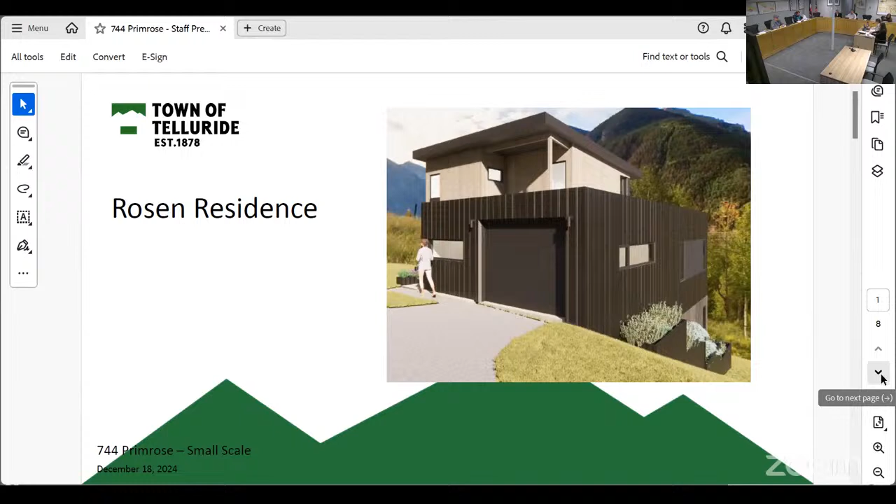Darren: Great, thank you Mark. So this is the consideration of an application for small-scale new construction of a principal structure in the Hillside Developing 2 Zone District, 744 Primrose. The project scope is new construction of a single-family residence. The proposal may look familiar as it was continued from the September 18th HARC board meeting as well as November.

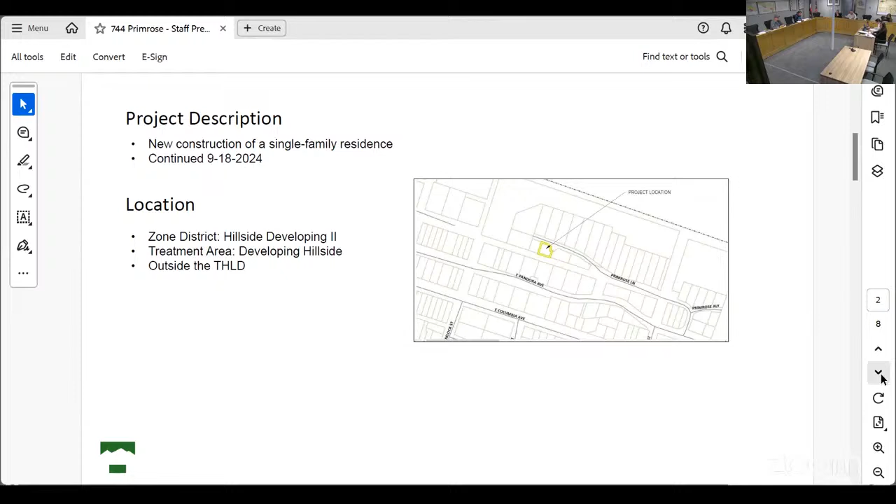The lot is located on the south side of Primrose Lane in the developing Hillside treatment area. Previous conditions from the September meeting, 1 through 3, all relate to the stepping down of the structure to better blend with the natural topography and reduce the apparent mass, scale, and visibility. To address these conditions, the applicant reversed the roof slope, lowered the upper roof 10 inches, lowered the parapet wall's height, and added planters to the west and southern facades. However, the overall mass and form of the building did not change significantly enough to meet conditions. Therefore, conditions 1 through 3 are retained.

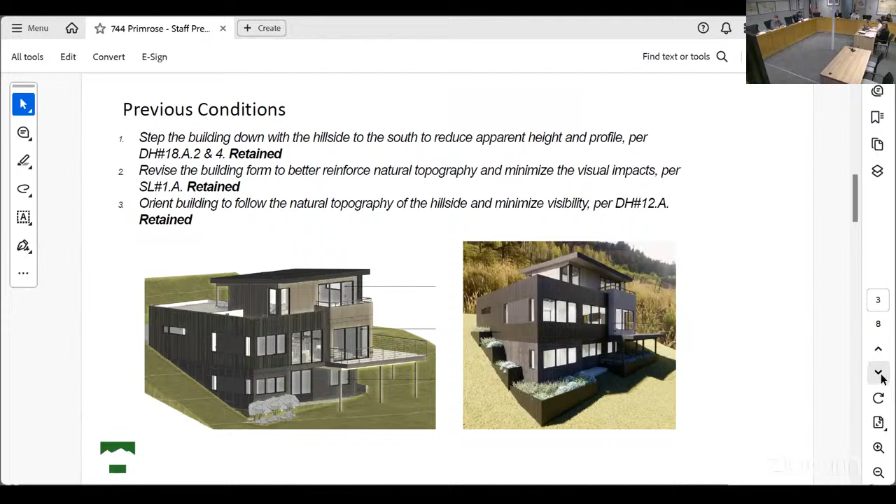Okay. Questions? Are you done? No, I'm still going. Oh, okay. Thanks, Mark.

Previous conditions 4 and 5 were to reduce the amount of glazing on the southern facade and to reduce the size and groupings of the windows to be more traditional. The applicant has reduced the glazing by 16.3%, with special attention to the southern facade. HARC should discuss if these conditions have been met.

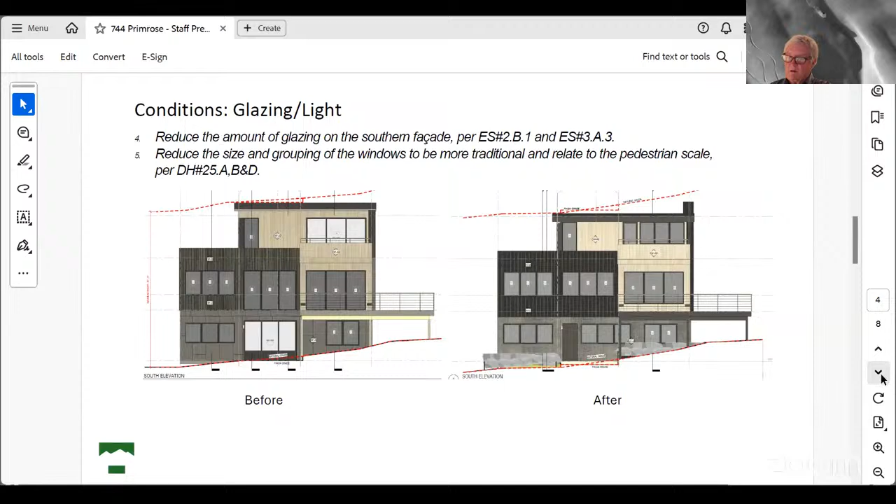Conditions 7 through 9 were to revise the proposed siding materials to be applied more traditionally with traditional dimensions and limit the use of corrugated metal on the principal structure. Wood, board, and batten are now proposed siding material for the garage and chimney element, with heavier materials such as board form concrete on the foundation. Conditions 7 through 9 have been met.

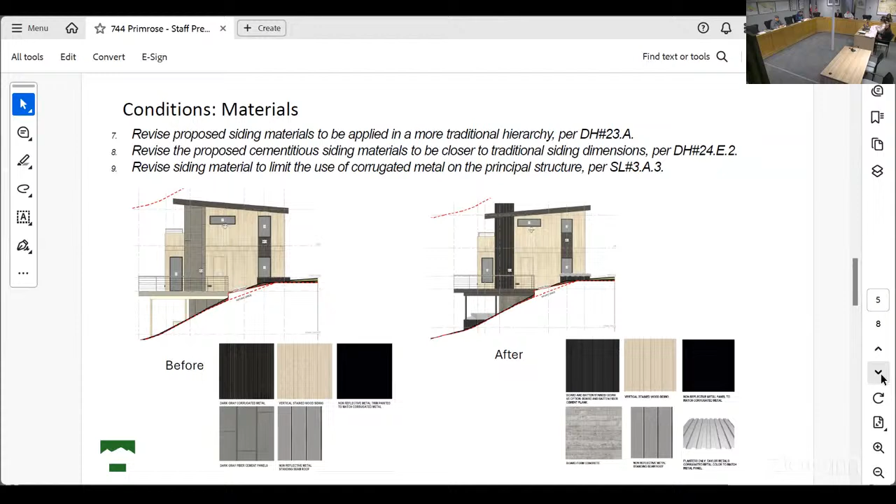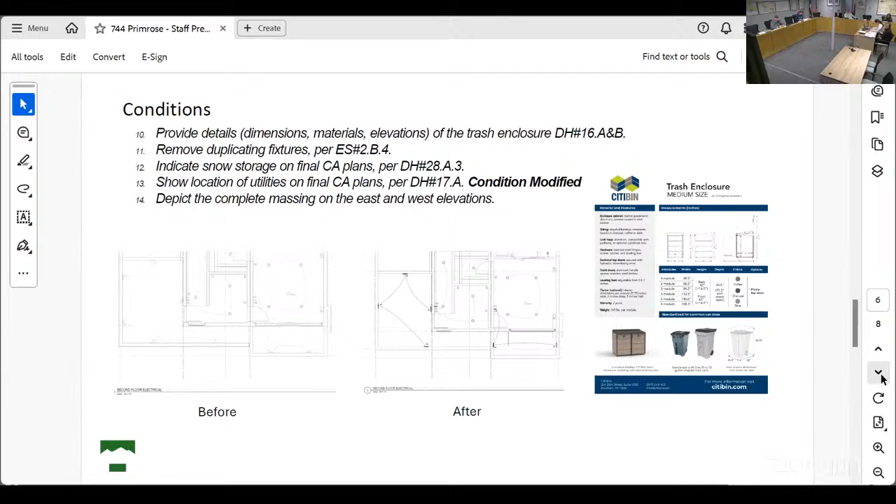Condition 10 has been met with the provided details of the trash enclosure. Condition 11 was to remove duplicating light fixtures; this has been met with 1 step light removed in the entry, as well as 2 removed from the upper deck. Condition 12 has been met with snow storage indicated on the plans. Condition 13 has been modified to show the location of utilities on the final CA plans. Condition 14 has been met with the first and second level decks now depicted on the west and east elevations.

Staff recommends adding a new condition to revise the landscaping and planters to be more natural to minimize visual impact. The proposed planters add a more ornamental appearance, affecting the visual impact of the building.

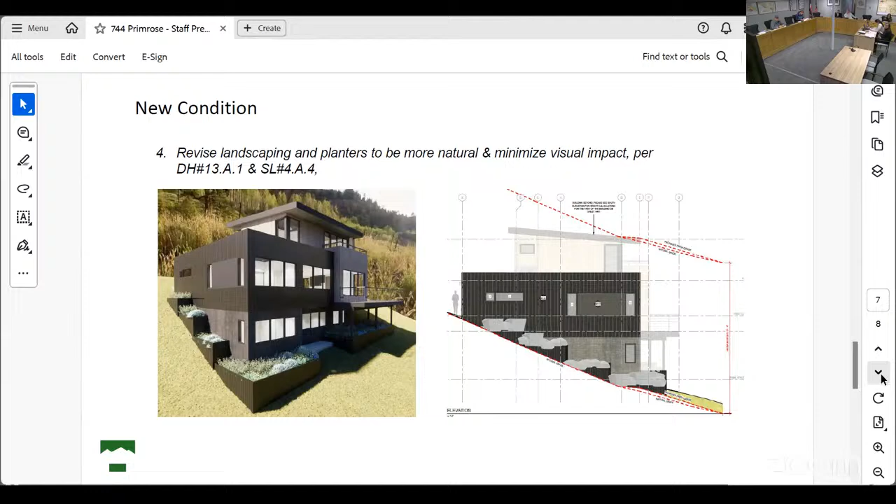A number of conditions were retained and 1 new condition added, revolving around landscaping. While the roof form was changed and the planters were added, the overall mass and form of the building did not change significantly enough. Given there are still concerns around mass and scale, staff recommends continuing the application. Thank you, I'm happy to answer any questions.

Okay, thanks, Darren. Questions? Okay, you did a good job. Thank you.

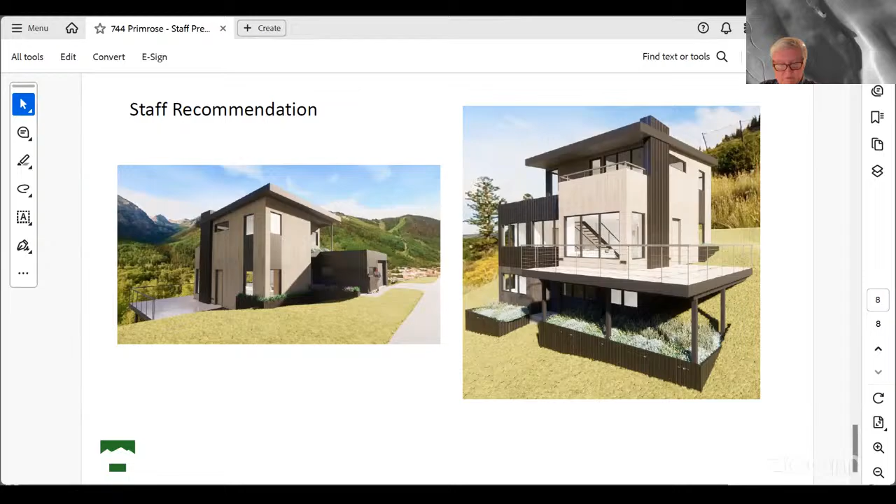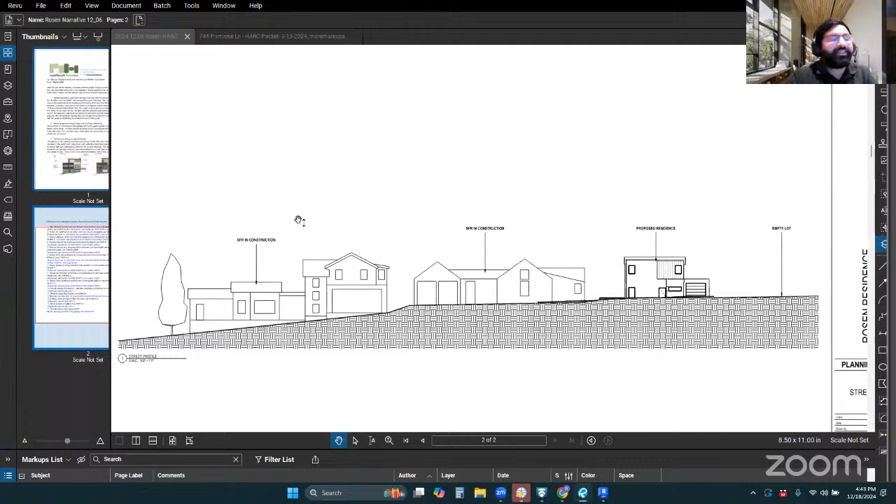And we'll hear from the applicant. Is Rohan remote, I assume? Yes, Rohan is remote. Okay, welcome, please. Great, share screen. Where's the sunshine? You must be in California. It's aspirational sunshine, definitely in Seattle, so very gray over here. Okay, great, thank you staff for presenting the project.

I wanted to start by discussing the steps we've taken to reduce the scale. We recognize the biggest obstacle in the last two HARC hearings was stepping the building down the hillside to reduce the scale of the building to the southern exposure. In the last hearing, the board recognized that the scale of this building is not similar to the scale of other buildings that have been reviewed.

This is a 1,500 square foot building, and this lot is the smallest lot in the Overlook PUD with the PUD bonus. Any additional adjustment of the footprint would go over the impervious area requirements set out by the PUD, so there's not much room to make significant adjustments to the exterior envelope to step the building down the facade any further than it's currently been stepped.

That comes from two pieces. One, if we tried to lower the building physically more on the lot, there would have to be a whole flight of stairs between the garage and the ground floor. There's already the maximum number of steps that make sense. We've already lowered the first floor relative to the street grade as much as possible.

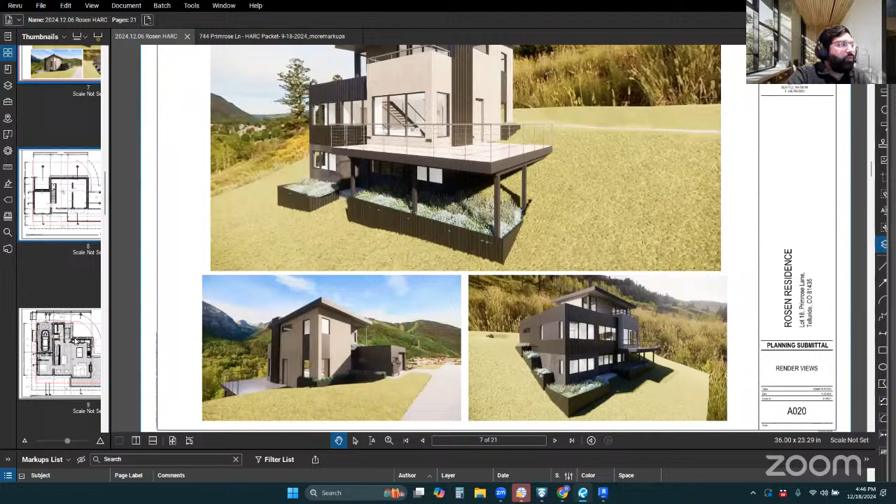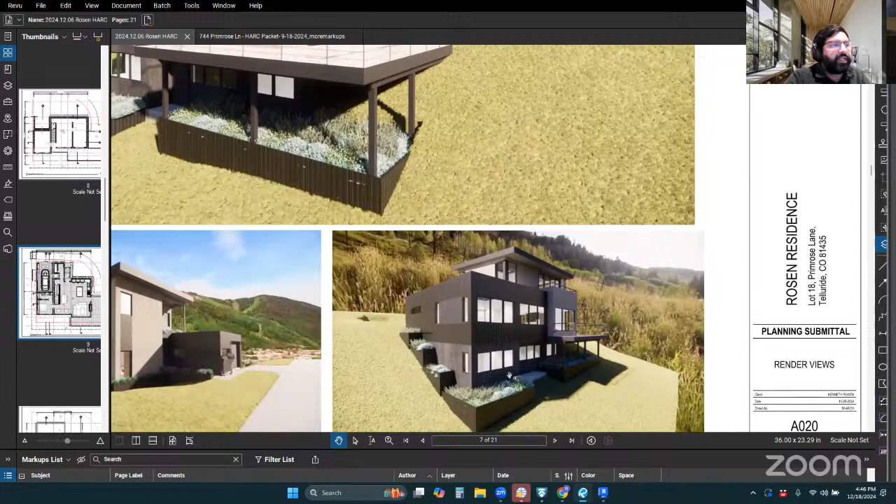The actual scale of the building itself, as I mentioned, is 1,500 square feet. Because it's on a severely sloped hillside lot, there isn't much more room for us to make adjustments to that. Beyond items 1 through 3, which relate to stepping down the hill face, we also reduced the glazing on the southern facade by 15%. We got rid of all the sliding doors and raised the windows for both the first floor and the crawl space area below the building. We also reduced the glazing in those two zones.

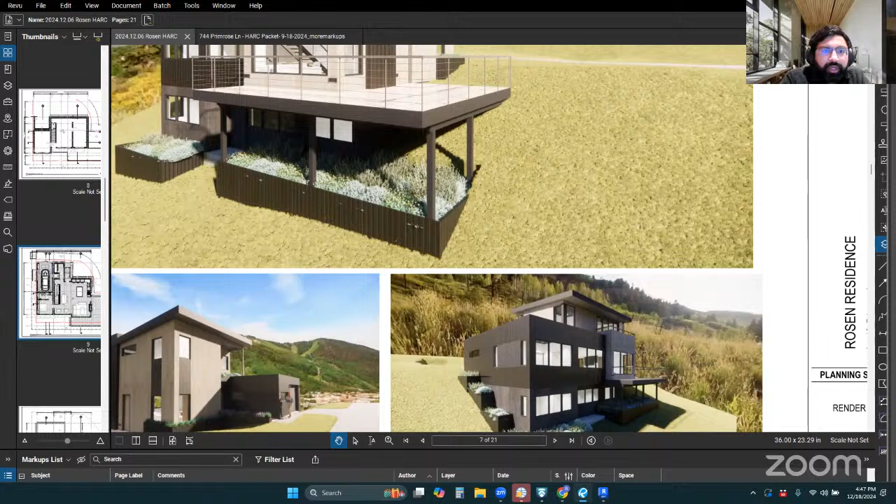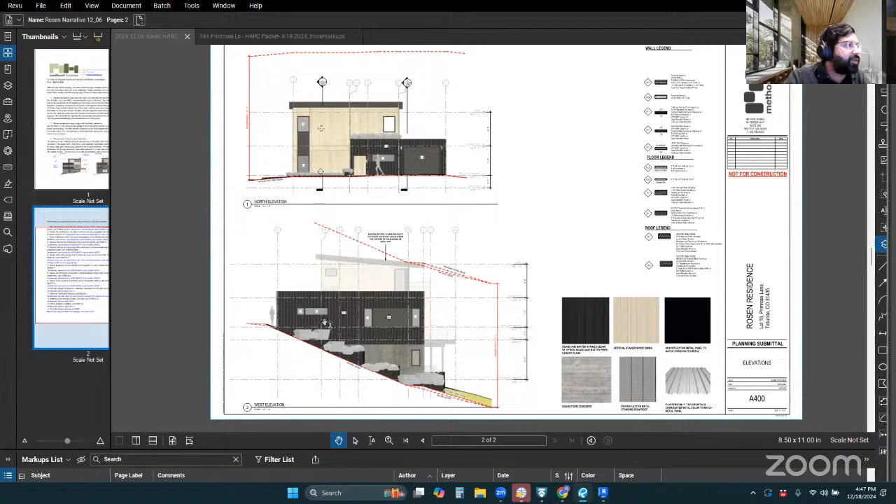Item 7 regarding the material hierarchy, items 7 through 14 were addressed already and recommended to be approved by staff at HARC, so I won't run through all of those to spare you guys the time, but I think the big thing is really just the capability for the project to step down the hill given the size of the lot. You can see here, if I scroll back to the site plan, how close we are to the setbacks as well.

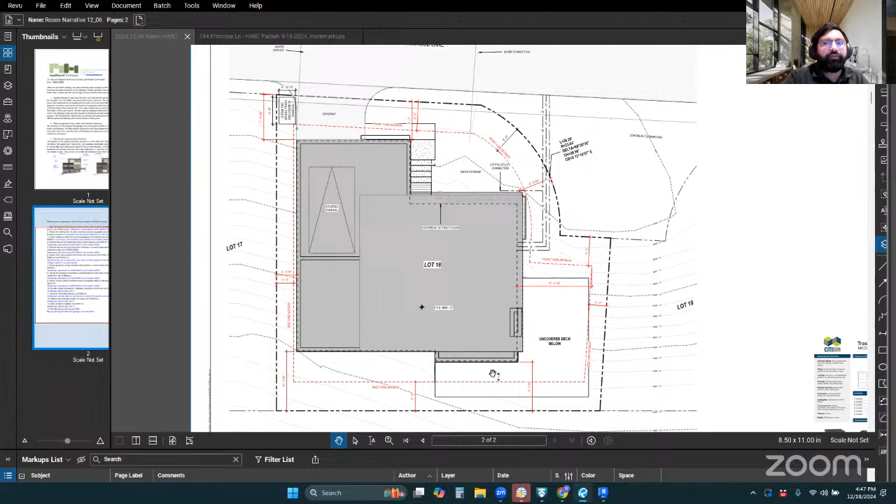Two other notes: we used the deck area to help the building envelope appear like it's stepping down the slope. The deck area is within the constraints of the PUD requirements, so I just wanted to mention that. That's all the items I have on my list.

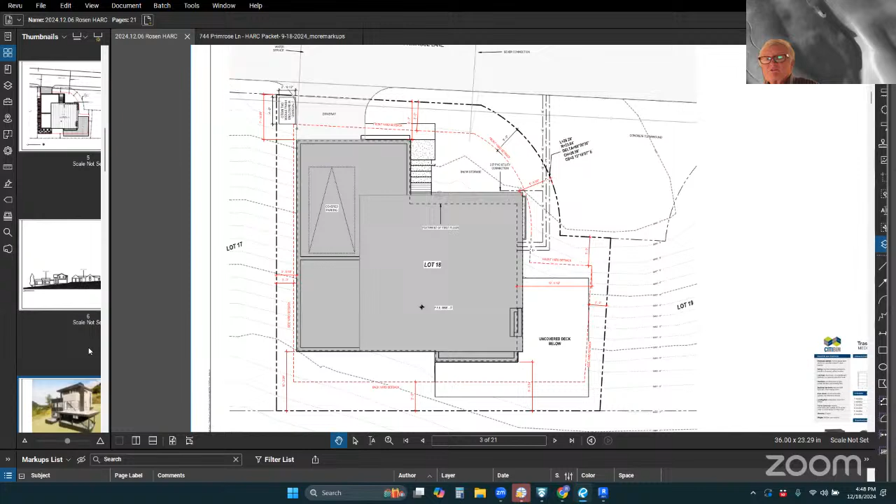Rowan, I'm going to kick it off with a question and get to the heart of it. Thanks for making the changes 7 through 13 that you did, appreciate it. But we're still stuck on mass and scale and stepping the building down. Could you go to that elevation view looking from the south or southwest? I realize the deck on the southeast corner has some breaking up of mass and scale, but let's go to the west elevation where you can see the topography.

So what is in the PUD? I just want to make sure I understand, and maybe others have the same question, but as Erica said, the building still does not step down after we made that a clear condition. What is preventing you from sliding that third story back and offsetting it to step down and go more with the hillside? What is preventing that? Is it something on setback?

So yeah, we were talking about potentially extending the basement out further to create the stepping. The reason the first floor can't get pushed back any further is this is only a 2-bedroom house being built here, and this is already a 10-foot bedroom in its current condition. So if we push this building envelope back any further, this bedroom doesn't actually fit physically in the space. The house is really constrained in terms of size, and it's being built partially custom modular - custom, but built in a factory and sent out in components.

And so there's a physical scale restriction because of the parking requirements here, right? We need to have this parking spot on this side of the house, and we can't really pull this essentially leg of the bedroom, this building back any further. Otherwise, this won't be a conforming bedroom anymore.

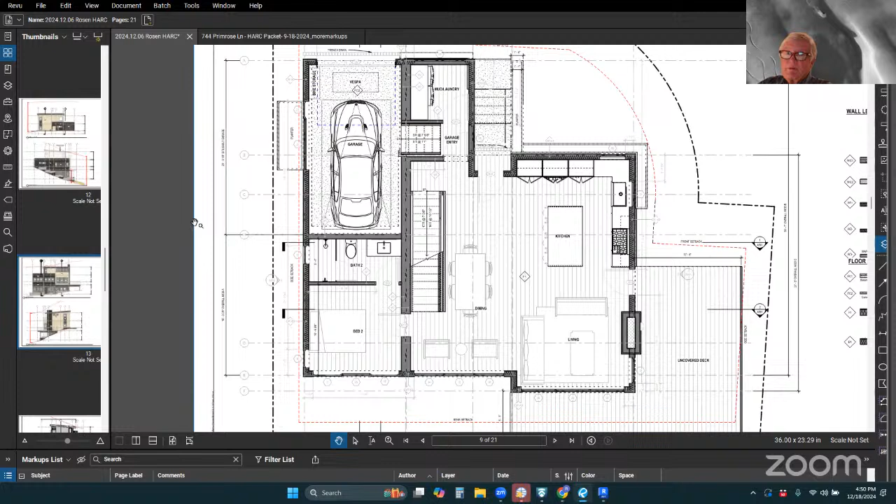Yeah, so there's actually a height difference. In order to help the building step down the physical hillside, we've already lowered this whole ground floor relative to the grade of the driveway. You already go down a half flight of steps just to get to the front door of the house, and that was done to accommodate making sure the house kind of steps down the hill.

But the depth of this garage can't get really any shallower. Is that sort of the question - can we make the garage shallower to be able to push the building envelope back?

Well, I'm just trying to get by the condition, which is so clear in the guidelines that the house must step down, and it doesn't. So I'm trying to help you get through this and saying, well, what else could you do?

I understand. I mean, the house is literally stepping down physically from the inside of the house. I understand your point. The other thing we can physically do is add to the cladding of the downstairs element to create a thickening of this lower volume. That's really the only other thing I can think of that we could do to create the appearance of us stepping down the facade.

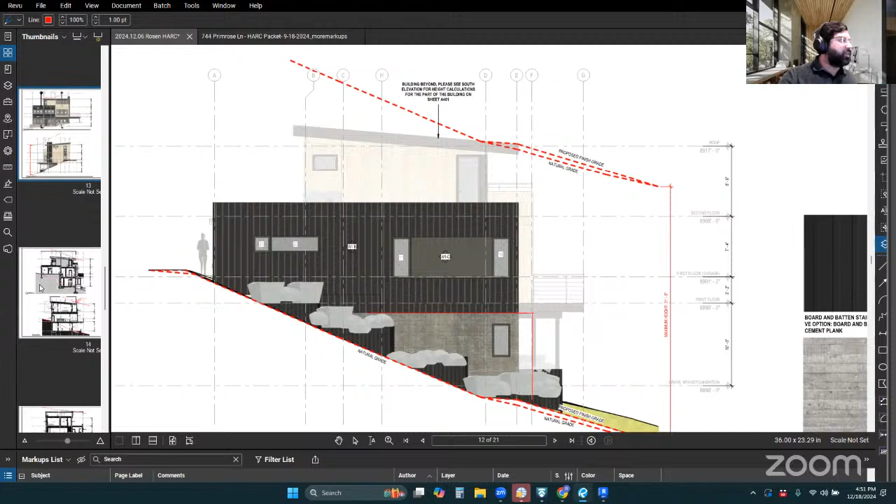We're only allowed 1,400 square feet of impervious area - 1,488 square feet, I believe. So that's really what keeps us from popping these walls out a little bit further to create the appearance of it stepping down the hill.

We did try to break the materials up too, so that you didn't have a single wall of material that was 2 stories tall in this location. The only other thing I can think of is we could put a retaining wall in over here, and artificially fill more soil on this side so that it doesn't appear. That's sort of what the planters were trying to do, show it filled, but we can actually physically fill this area with soil so it's more embedded, and we can do that on both sides of the house.

Okay, I'm going to let... Sorry Mark, if you want to keep going. No, I want to let others speak. So Bob, go ahead. Could you show the floor plan for the very top level?

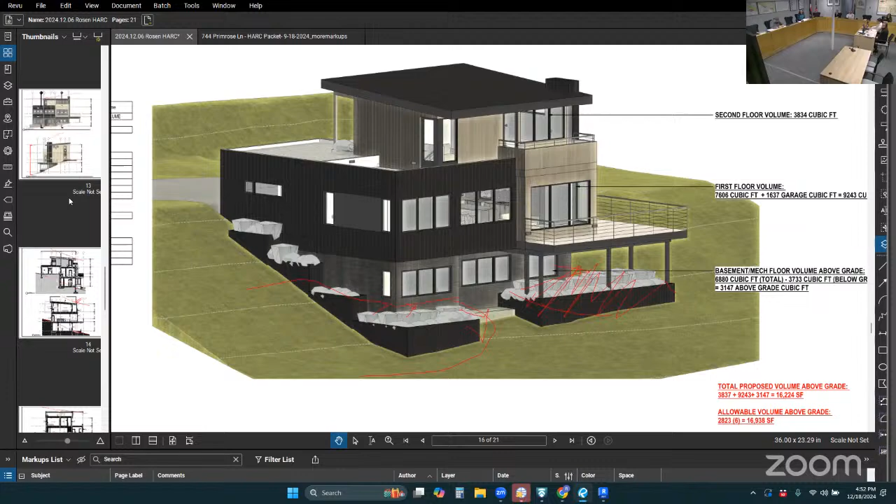Show the entire... okay. Is it possible that could move back?

That whole element, push it back, and then you have a stepping from the first and second level, and the third level would be further stepped back. So you do have that sense of stepping down the hill.

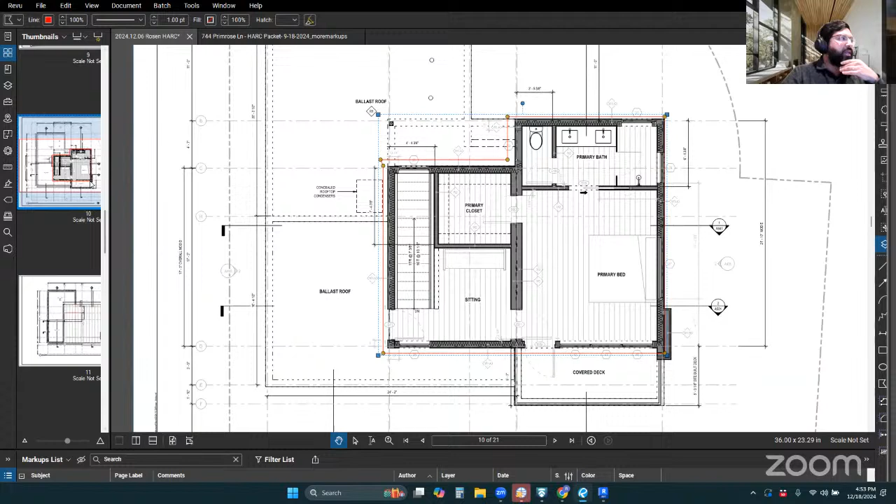The thing that's dictating where this line is is the end of the stair that's here. It's exactly 3 feet, the minimum landing depth at the top of the stair. And if we turn the stair and have steps this way, which we looked into to pull this facade back, then all of a sudden the usable space of this hallway is gone because you're below the minimum head height that you need for a ceiling over there.

So we had even looked into putting a landing here and having 3 steps, kind of go this way. Does that make sense? In order to be able to pull this back, and pull upstairs back, which exposes this condition more to the elements, of course.

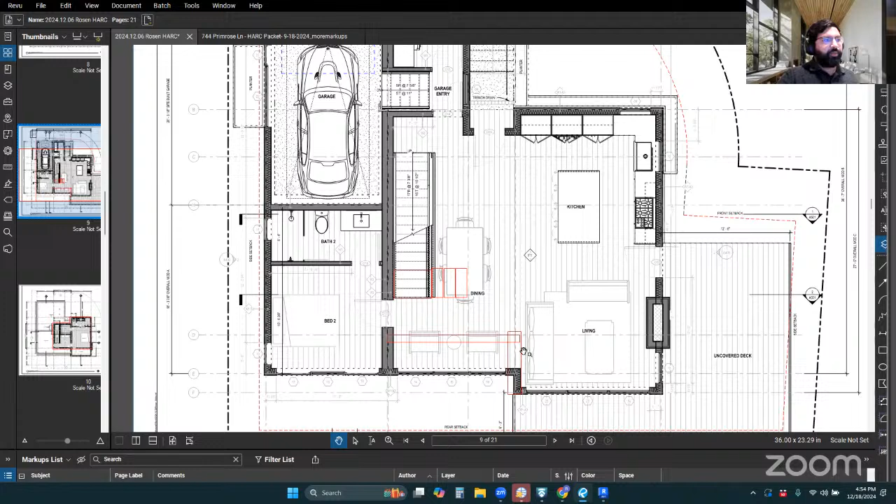But if I go back to the southern facade, you can kind of see what I'm talking about. So essentially, the other thing, if I can find the 3D view, we'd also talked about - what happens if we just step back this zone right here, because that's not in the bedroom. What if we physically pulled this back and there was a return there?

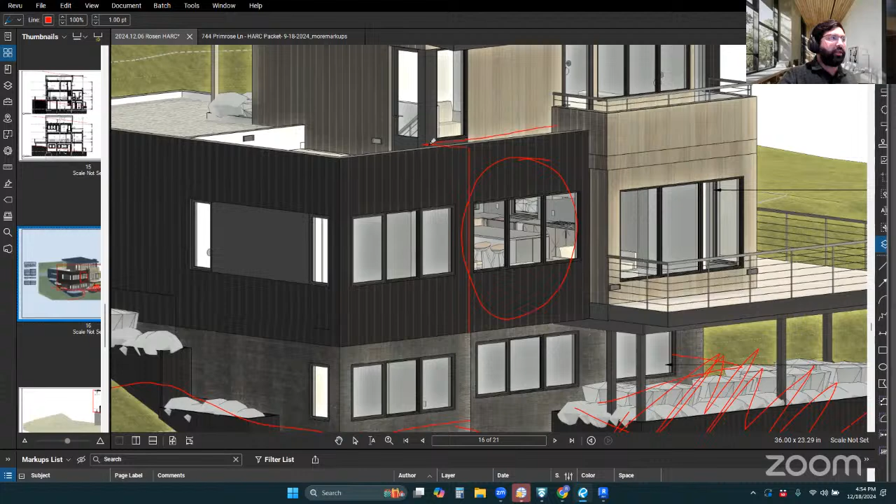Would that be enough for HARC? If there was essentially a bigger reveal in between these two, it doesn't feel like that really impacts the sensation of it stepping down the grade when the grade is here, right? Something that's happening in the center didn't feel like it made a difference.

And I mean, of course, we could expand the deck out because technically by code, we're still allowed to have the deck continue out over here. So we could expand the deck and then it would look like it was - I mean, I don't know.

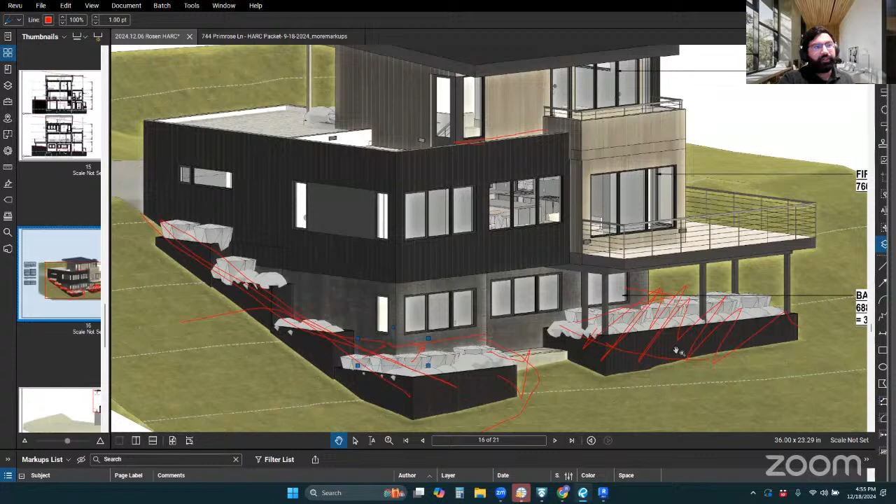It's arguable to say that the deck feels like it's stepping down the hill any more than the house does, but theoretically we could extend this deck around the side of the house, and you would have a break in the building envelope. Does that make sense? If I go back to the west elevation.

So if we did the same thing here, we would be increasing the scale of the house, but it would still be in accordance with the PUD requirements. Do something like this.

Because I think part of it is the fact that you're reading a wall that's this tall, right, when you're looking up at it from the southern facade. I just think that doesn't really accomplish - it may accomplish it technically, but physically I feel like the best way to accomplish that is to adjust the grade physically up and kind of make it feel like it's more buried in the hill, if that makes sense.

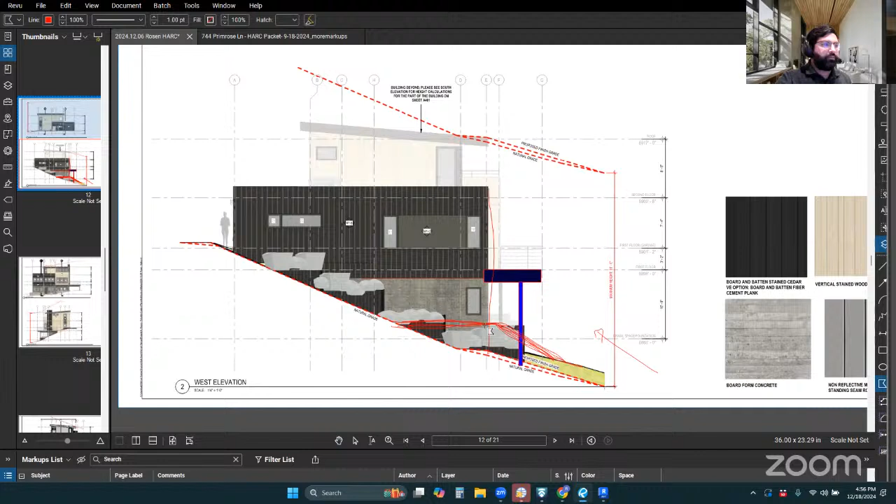Okay, who else wants to ask questions or probe this?

I mean, we've continued it twice. It's time to add a little more specificity. We're not supposed to design it, but somehow we've got to come up with some ideas or help the applicant come up with some ideas. Your questions, he's just thrown out two things: change the grade to artificially make it look like it follows the topography better, which might comply, or extending the deck out. Those are two ideas, but are there other questions or any other ideas since we're stuck?

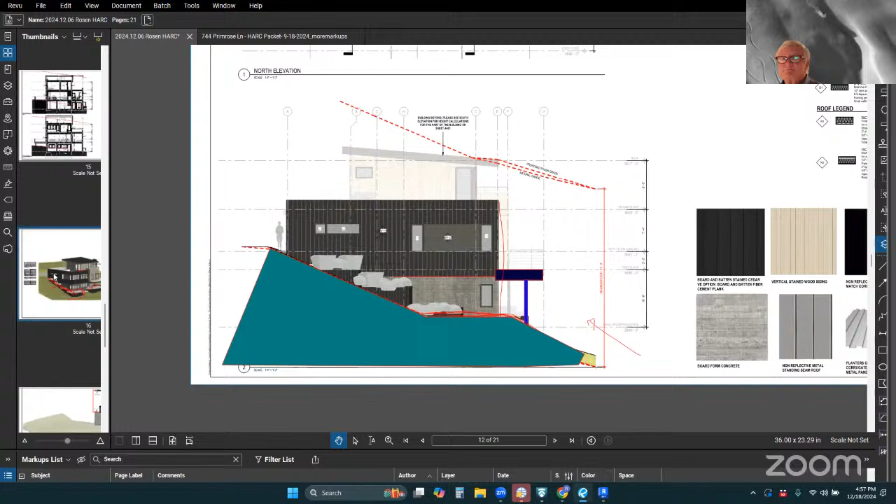I don't have any questions, Mark, but I've got a fair amount of commentary once we get to deliberations. Okay, but about this, I don't want to lose the applicant before we give him a chance to comment on any other questions that we might ask ourselves during deliberations regarding the slope, the stepping down. Let's at least try to get by that, and then we'll move on to some other issues.

Sure, I guess I can comment on the applicant's idea of altering the grade as he's shown. I think that's often a useful technique as long as we don't get into a zone where the grading feels unnatural. Grading is not a perfect slope, there's undulation, so I think there's some latitude there to bring the grade up to help bury the project in the hillside more without it seeming artificial. So I think that's a good technique to use.

I don't think that single method will resolve the stepping issues that we have. I think predominantly they're at this southwest corner we're looking at, and to some degree also from the west.

I agree with you, yeah, it's still not stepping enough. I appreciate this is a small lot, and that you're working, trying to get as much square footage as you can on a constrained site. I understand you're trying to work from a modular system. Unfortunately, the design guidelines weren't written with modularity in mind, and I don't think we should really bend our guidelines to fit the construction methodology.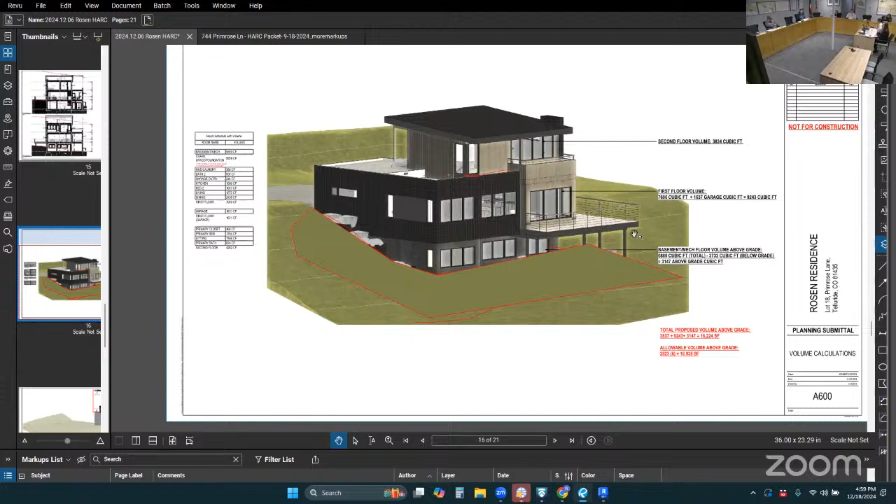I don't really want to get into this dialogue, but does that second bedroom have to be on the main level? Can it move to the basement? I think you're maybe locking yourself into some space planning and programming ideas and not taking into consideration the mass and scale, which is very important to this board.

That's kind of how I feel about it, the big picture. Well said, I agree with what Matt said. Me too, I mean, I think, all right, Darren's conditions are kind of perfect for this.

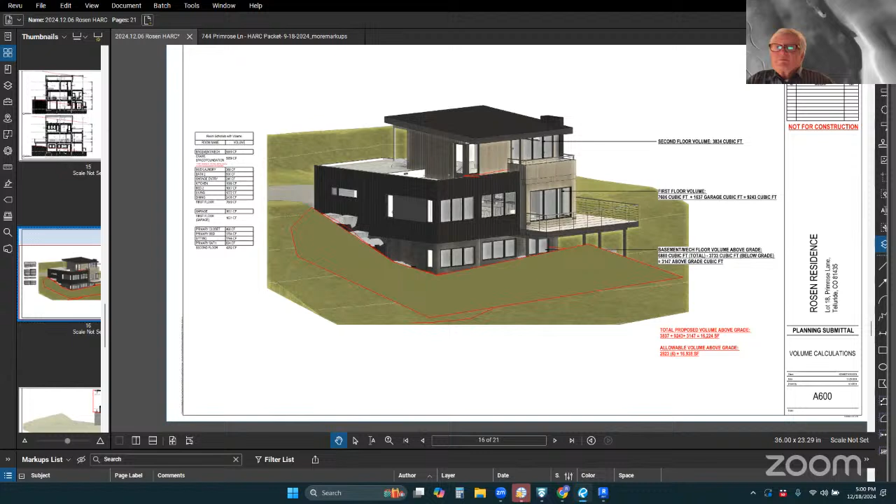I don't want to talk anymore unless we're moving into deliberations. Now, just questions, and if there are no more questions, or if the applicant wants to respond to any of this now before we lose you, well, public comment and then deliberations, that's going to be continued.

I would like to respond if it's that fifth segment of the process for me to respond to these questions. Yeah, please, throw out whatever ideas you have.

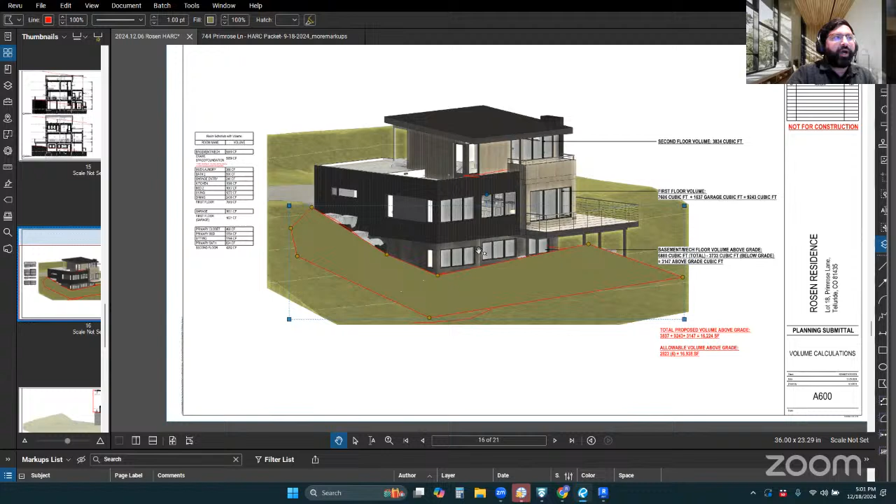I definitely hear the board in terms of the guidelines that are there. I'm not trying to use the PUD or the lot size as an excuse for any of the decision making, but I wish I could demonstrate the volume constraints and the area constraints more aptly to show why we made the decisions we did. Like you said, if we bury the house into the hillside, sure, it would step down the hill. But every other house in the neighborhood is a two-story house, and this is by far the smallest house by footprint in the neighborhood.

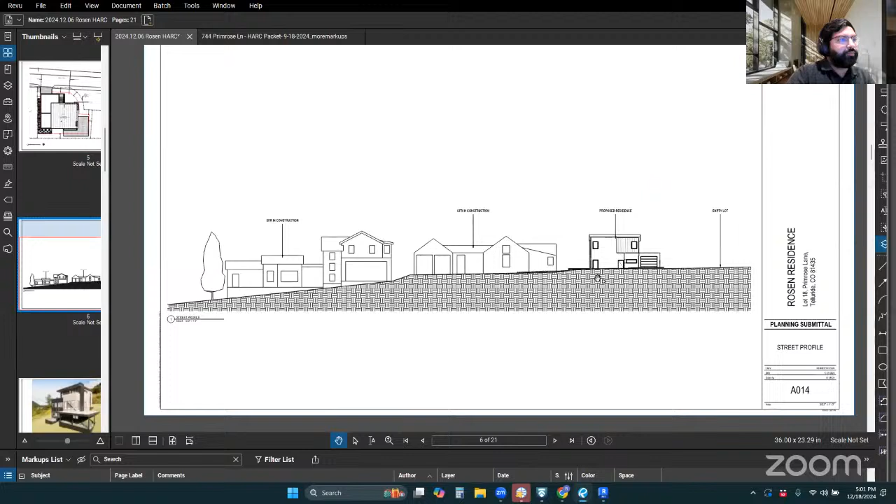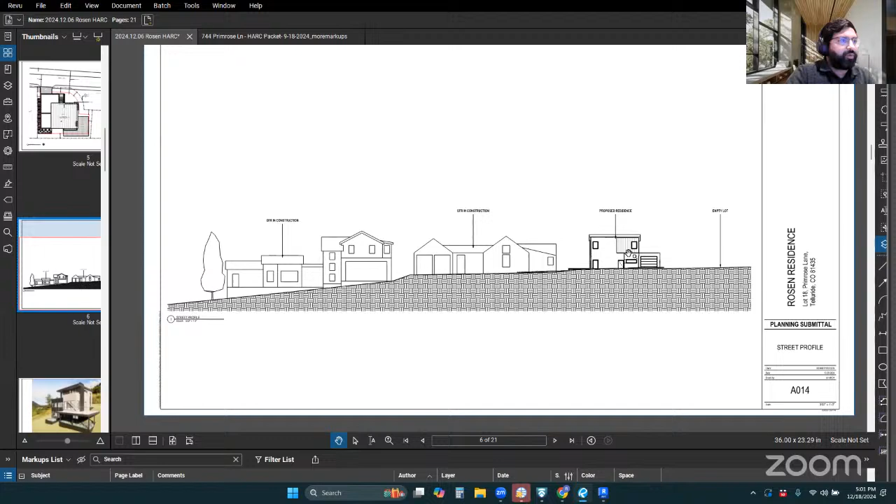The only solution that appears to me to be available according to HARC is not having a second story, because the modularity isn't what's constraining the actual physical design as much as the impervious area and volume calcs are. By both of those, we're just conformant within code because of the way the hill steps. So I just want to know clearly if the direction is that we can't build a second story, or if the direction is that we should go back to the drawing board in terms of this house stepping down the hill, and the southwest facade is the only point of concern.

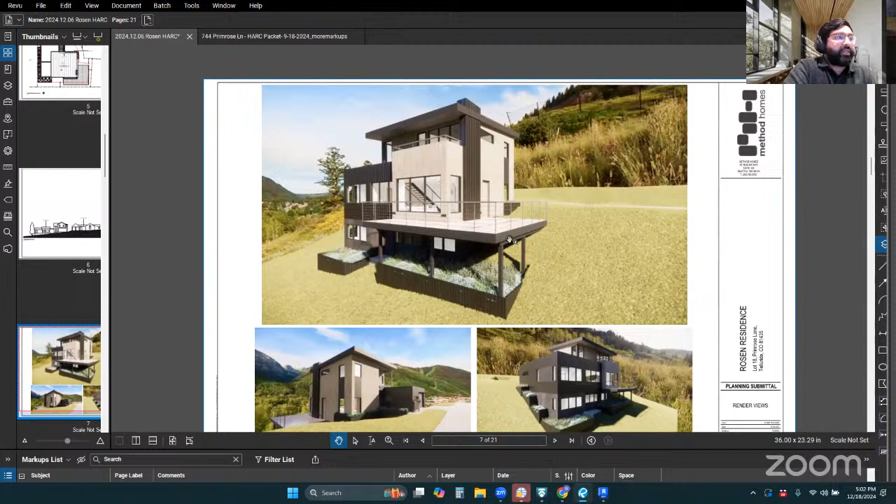Then we can look into trying to redesign this building even more to constrain to that. To me, the northwest side is double the height. The second story that's there is the side that looks like it's stepping down, and the reason is because of the deck. If it wasn't for this deck here, I think you guys would feel the same way about the northwest corner as you do from the southwest corner.

So I guess my question to the board would be, would an extension of the deck, the solution that was used on the northwest corner, be sufficient for the southwest corner? If it's not, then we'll have to find an approach that the board wants. I just would like direction relative to that.

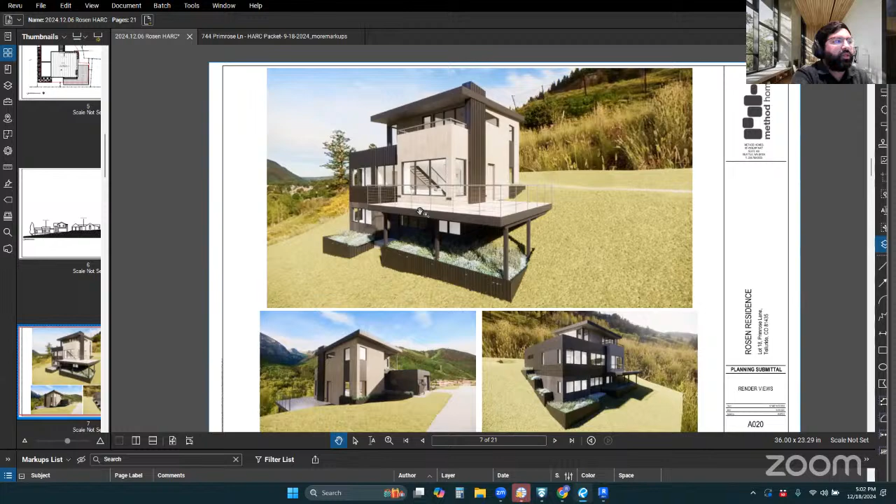Okay, we'll discuss that in deliberations, but thank you for responding. If you have nothing else to say, we'll hear from the public. Thank you. Any public comment? If you're out there electronically, please raise your hand. I don't see anybody, so we'll move on to deliberations.

I guess I'd ask the board, Kieran, I haven't heard from you, but I assume we all agree with one through three, this mass and scale and stepping down the hill. My question would be during deliberations: do we concur, so we get some feedback here in this motion, that artificially just adjusting the grade by itself is not enough?

That's what Matt said, and I would concur. Let's just take a straw poll. By itself, do we believe that's not enough? Just real quick, start with Kieran, yes or no. I'm gonna do my usual thing that I can't really judge it till I see it. Okay, that's fair.

No, I don't think so. I think raising the grade where appropriate would be a good technique to employ, but I don't think that's enough. I agree with Matt. Same, I'm on board with the rest.

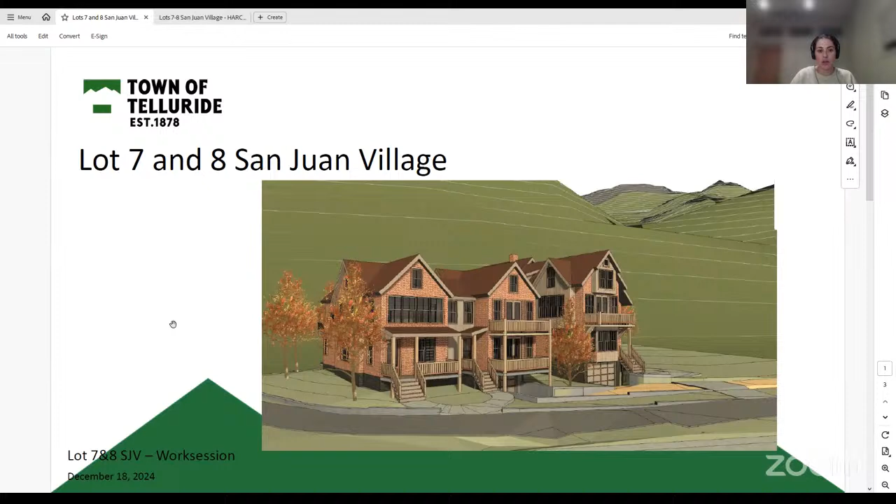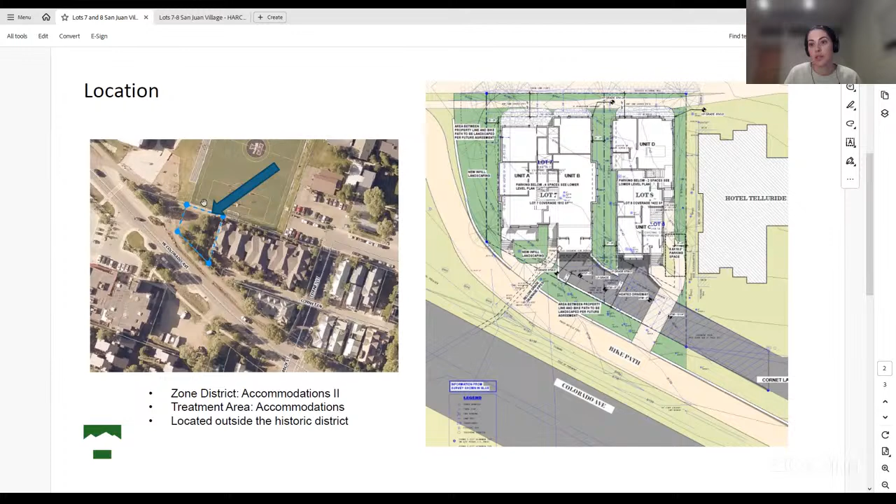It is located in the Accommodations II zone district, the accommodations treatment area, and is located outside the historic district. The lot is located not directly across, but across from Clark's Market, and the turf field for the high school is behind these two lots.

Per a work session, HARC is requested to provide general feedback on the options presented. And as a reminder, a work session is not intended to vest the applicant or the public with any reliance as to the outcome of the formal development review process. I am happy to answer any questions before we hear from the applicant.

Canyonlands Northwest varies from about 20 to 26 feet. The Tower House condos vary about 9 to 10 feet. And I did some rough measurements of the Hotel Telluride, and on that southwest corner it appears to be set back about 25 to 30 feet, but that's just a rough estimate from the assessor's website. That's off the property line, not the street. Off the property line, yes.

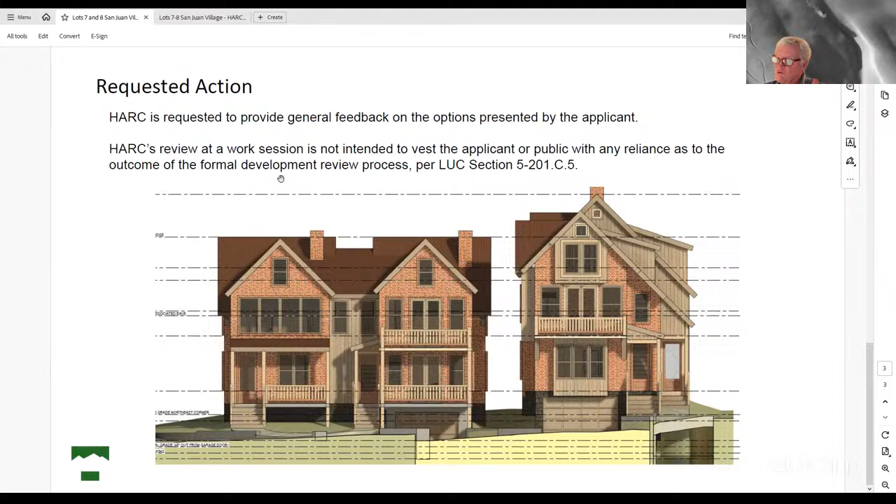And so if Northwest Canyonlands, right across the street from this, was 20 to 26 feet off the property line, about how far is that off Colorado? I'm thinking of the view corridor and the sensitivity of this entrance to town as we rewrote the guidelines to address this with more sensitivity.

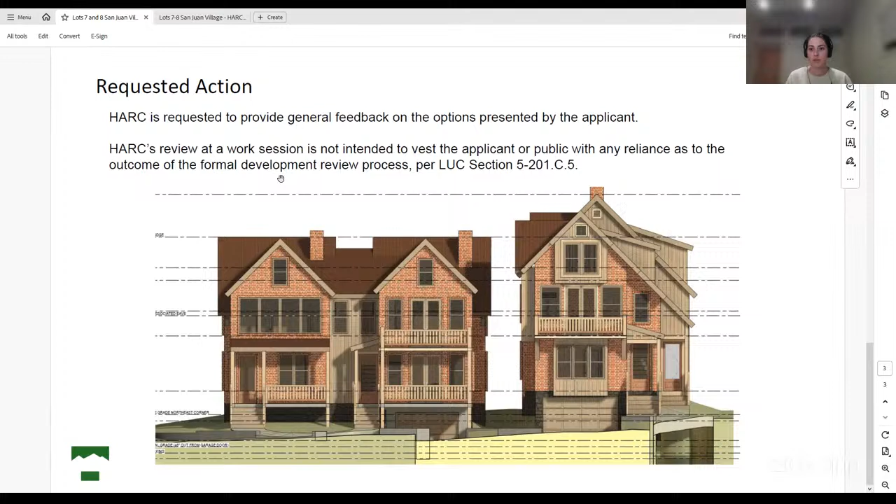About how far off Colorado? I thought that was almost 40 feet off Colorado, but it's at least 35 feet, right? Yes, because you have the pedestrian path and landscaped area, so I can't give exact measurements, but if Canyonlands is 26 feet to the property line, it's at least 30 feet to Colorado Avenue. Okay, thank you, that's the only question I had, but other board questions?

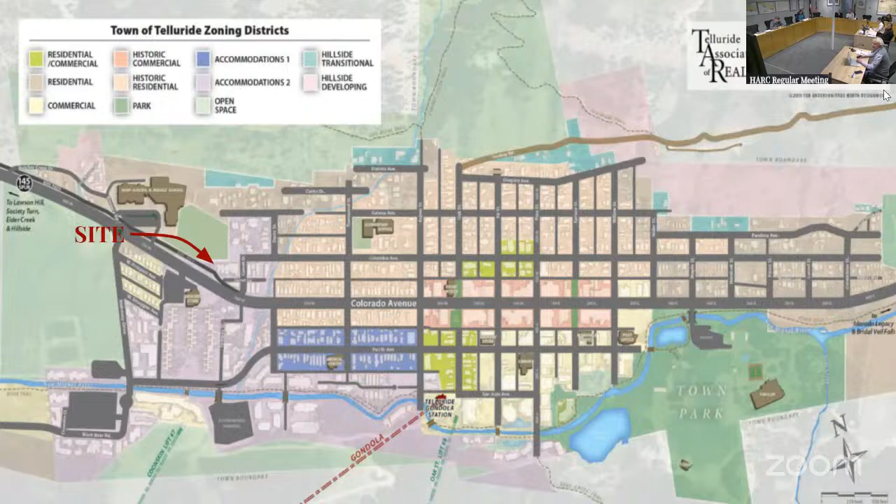Different zoning districts—we're in the accommodations zoning district. This shows the historic district boundary, so we're clearly outside of the historic district and not very close at all to any historic structures.

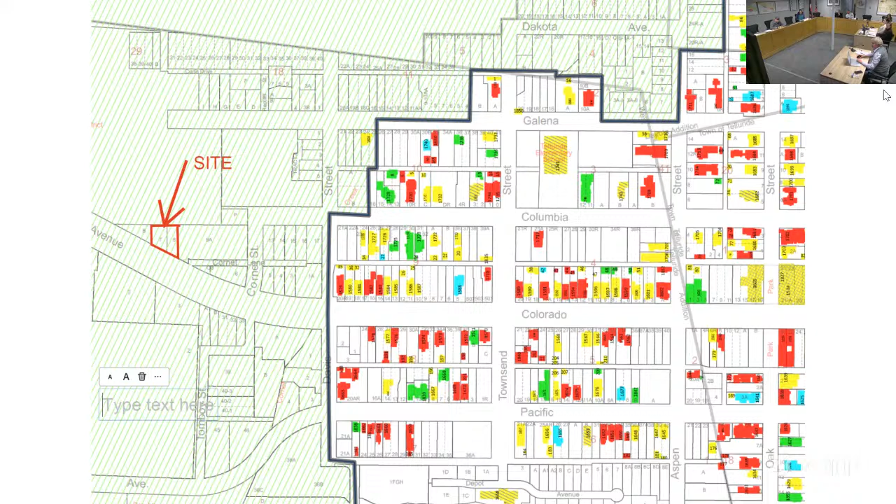And you can see these lots are better shown—let me go to this. So the green circled area is the San Juan Village PUD that was done in the late 90s. I was actually involved in it as a consulting architect and developed some of the standards.

I'll say that these two lots are kind of the leftovers, maybe the leftovers of the entire town. So they're very odd shaped and very oddly placed—next to the ball field, close to the school, across the street from Clark's, smack up next to the hotel.

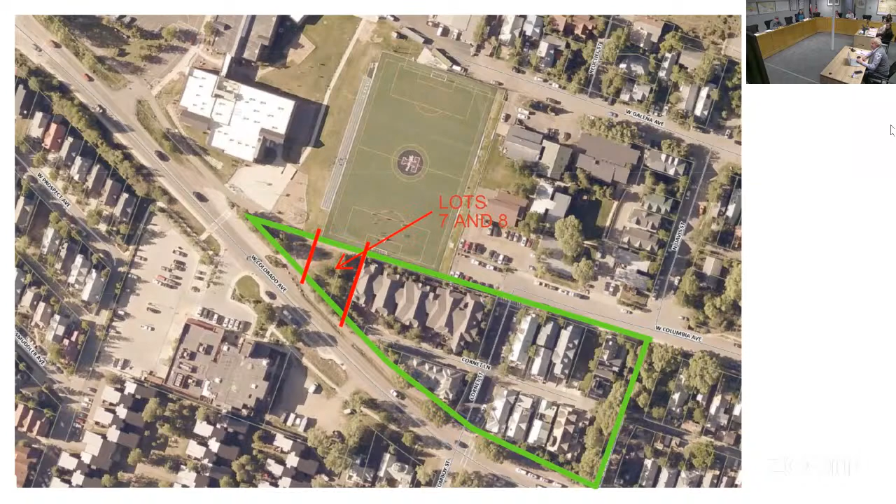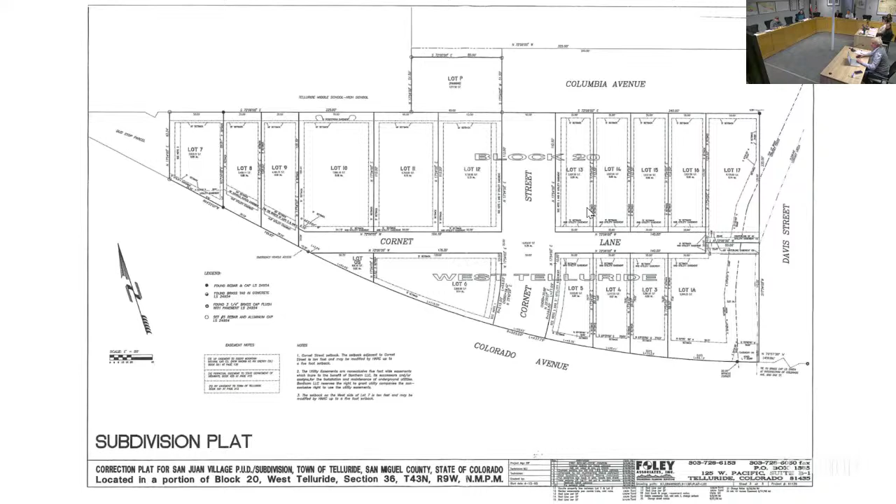So it's an unusual beast, and when this was platted, they clearly saw these lots as transitional lots. So the left two lots, the far end lots, are the transitional lots to the much taller and more dense lots. The hotels are on lots 9 through 12 here, and then on this side of Cornet Street are 35-foot tall single structures that are supposed to emulate oversized homes within the district.

Here's the survey. The access is not from Colorado Avenue, so it's through the little alleyway in front of the hotel. So access and parking and all that's a real challenge.

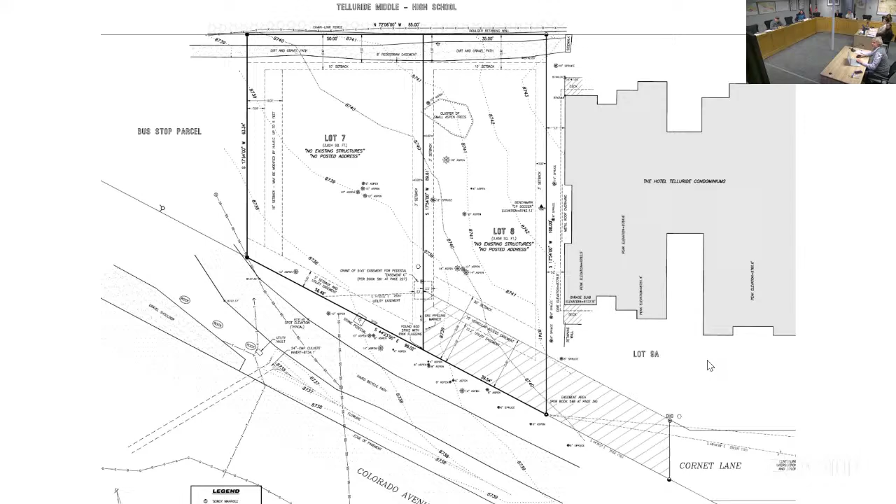Okay, here's our site plan. Initially we came out saying, well, let's just do one big building for 4 townhouse units and go through a PUD process where we get rid of the lot line and do one bigger building. Then we started to look at the complexities of redoing the PUD, and the advantages of coming in just with 2 duplexes made a lot of sense to do.

So you can see the bike path here—we're right on the far side of the bike path, and the ball fields are directly to the north. Circulation-wise, we're coming off the little alley in front of the hotel, and we're going down like a half a level into each of the two buildings.

So this will technically end up being two applications, because on lot 7, technically it's a duplex, not a single family or multifamily, on each of the 2 lots.

Okay, so here's the site. You can see the left, and when you look at it, you're like, can 2 buildings really fit in there? So yeah, they can.

So yeah, this is—I mean it's called Cornet Lane, I call it an alley. The dumpsters are in there, the underground parking for the hotel to the right, and all the utilities for the Gold Dust building on the left side.

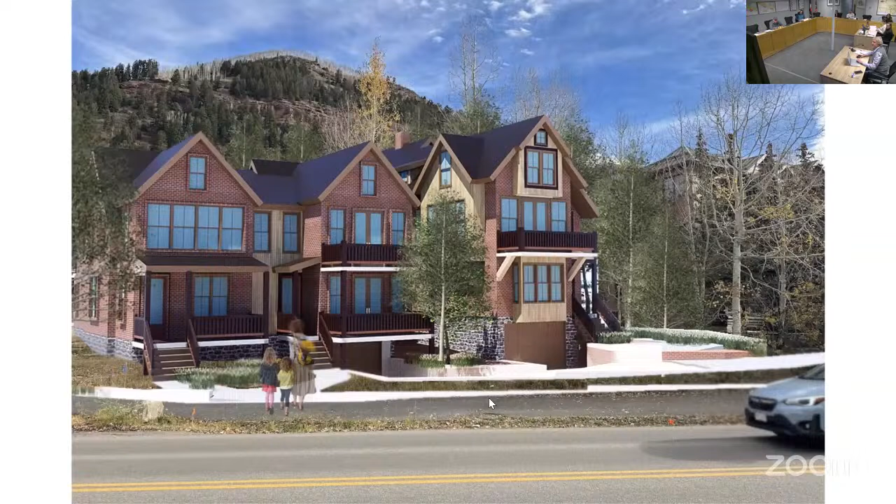And here's another photo montage. You can see the road here, and that's the bike lane, and then set back from there to the building itself—all the way to the edge of the building is fairly substantial. I don't know the true number on that. Different view from the southwest.

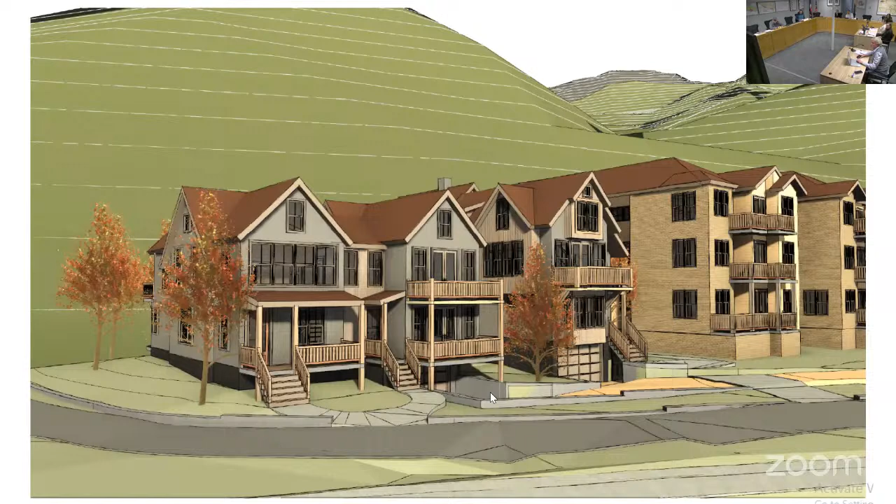And we're contemplating the use of brick on this. It gives a nice sturdy appearance and dressy appearance and quality. There's brick on the school and brick throughout the town.

The other thing I wanted to underscore is what we're trying to do is a roof form that emulates the typical roof form found in the historic district, the north-south ridge, the fairly narrow mass, in the 15 to 19 foot range, 12-12 pitch, and the use of porches and 1-story elements, and a variation of window types.

There's a kind of an aerial isometric view, another one for the other direction. This is the backside from the ball field, looking back at the two buildings.

So this shows you in plan how the units are set up. On the left lot here, we have kind of a left and right unit. And then on the right hand lot, lot 8, you've got a unit in front and a rear unit.

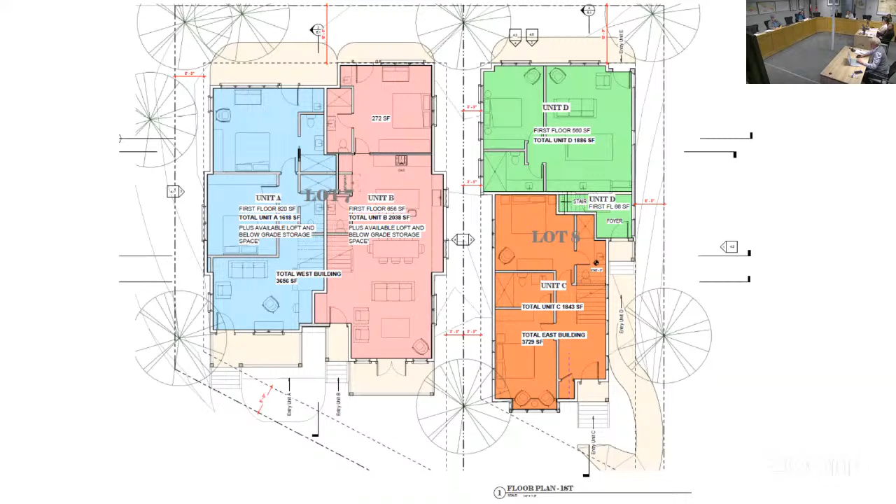Elevations of the westerly lot 7, lot 8, easterly building elevations, and streetscape.

So you can clearly see we're dictated. The hotel has a 35-foot height limitation. Lot 8 on the right side steps down to 30, and then lot 7 we're limited to 25 feet, which is the standard height in the historic residential area.

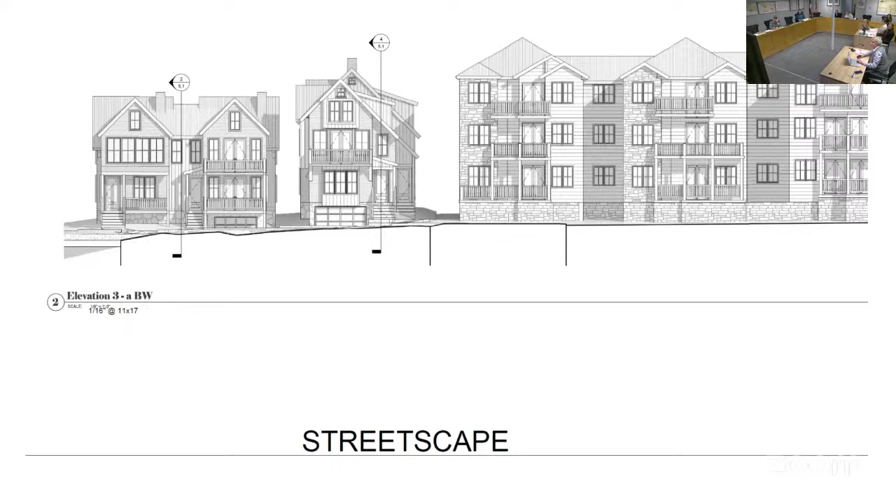So on lot 7, we comply, we've got 2 units as a duplex on that. On lot 8, it actually says that the minimum number of dwelling units is 3, as opposed to the 2 that we have, and the maximum is 4.

So this may force us to go to P and Z to get this chart readjusted. Maybe there's a streamlined way of looking at it, but I wanted to point out that if you take the sum of the minimum number of dwelling units for the 2 lots, 1 and 3 is 4 units, and we have 2 and 2, so we do match the minimum number of dwelling units as a sum.

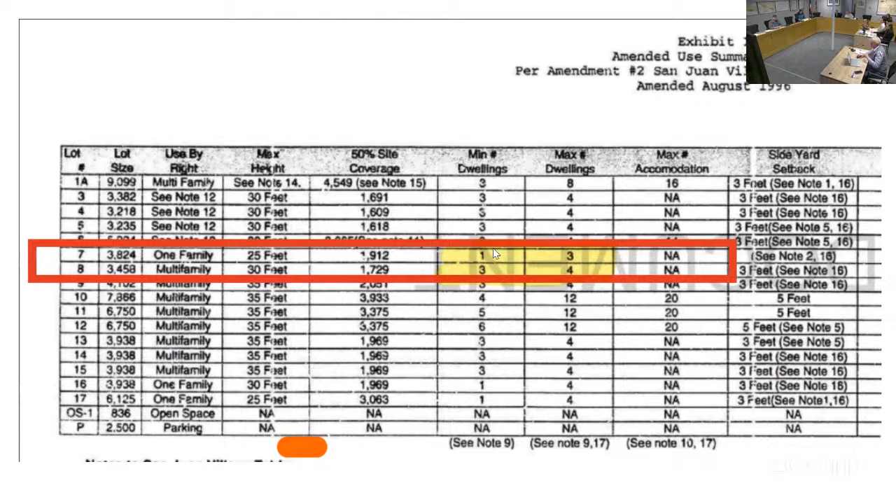So I think that's about all I have here. I'll be glad to answer any questions as you get into it. Thank you.

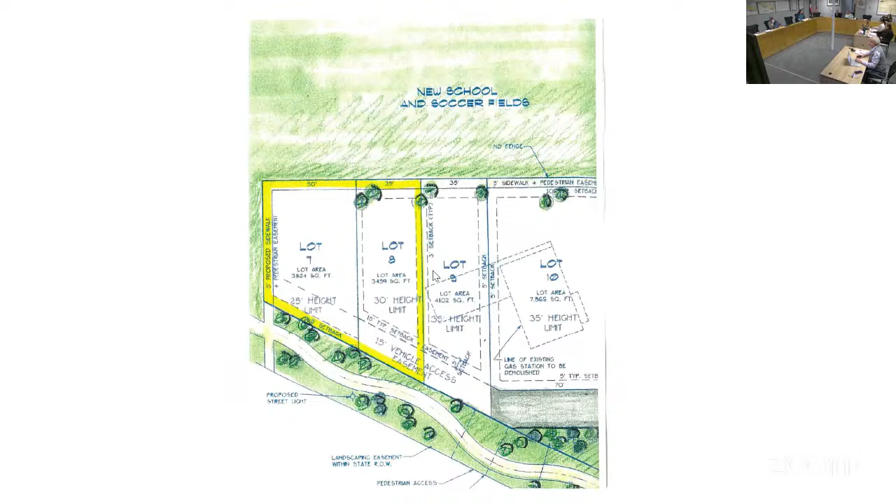Okay, who would like to start? It's informal, we can talk about design ideas, doesn't just have to be questions. Go ahead. I've got a few if you want to start. Okay Bob, first is a question.

On the north side of the building, there's that dirt, what does it say, dirt and gravel path. And it appears that there's some elements of the design that are encroaching into that. Is that like an easement space, across the property?

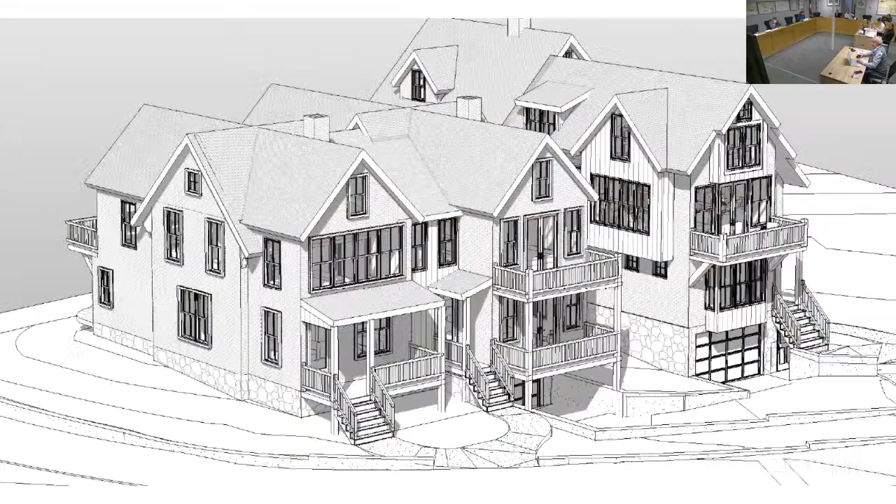It's actually described in that cryptic chart, and my interpretation from the chart is that you are allowed to do elements. You're not allowed to do the building itself in there, but HARC is allowed to approve elements in that space. So what are you proposing, just a paved area? It's just like patio terrace areas and the balcony.

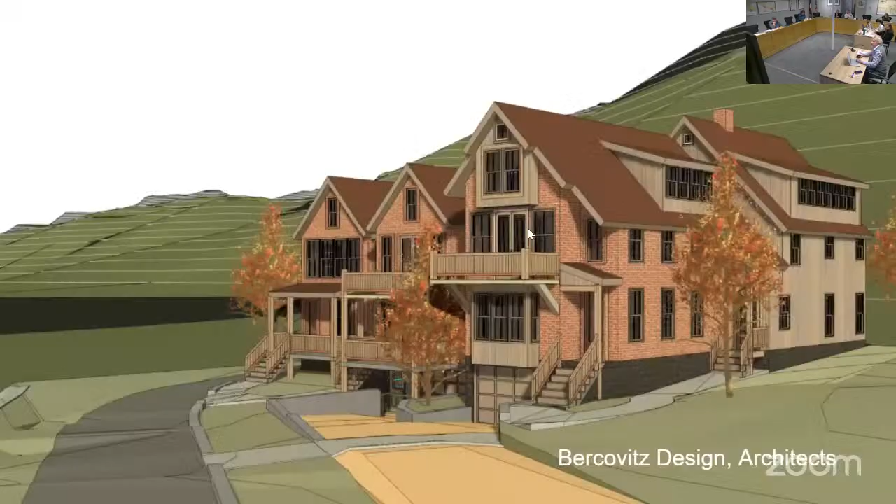But they're above the grade of the, right? Yeah, and those terraces should actually be flushing out with the grade. It just looked kind of funny to me that they were encroaching into the pathway, and it's not a very big pathway. Let me see if I can find the... something you need to maybe double check.

Seems like there should be a distinguishable separation between the public and private space there. Yeah, but maybe it's going across their property line though, that's the problem. Anywhere else, I would think you'd have an easement across there that you couldn't encroach in, but there's something that says the 8-foot pedestrian easement. Can't tell what it's referencing, or what it's dimensioning to.

Yeah, no, I agree. It's quirky looking here, and we'll be careful to look into that more carefully. And I like the idea of creating a separation, a clear separation between the pedestrian area and the little terraces, if they're clearly allowed.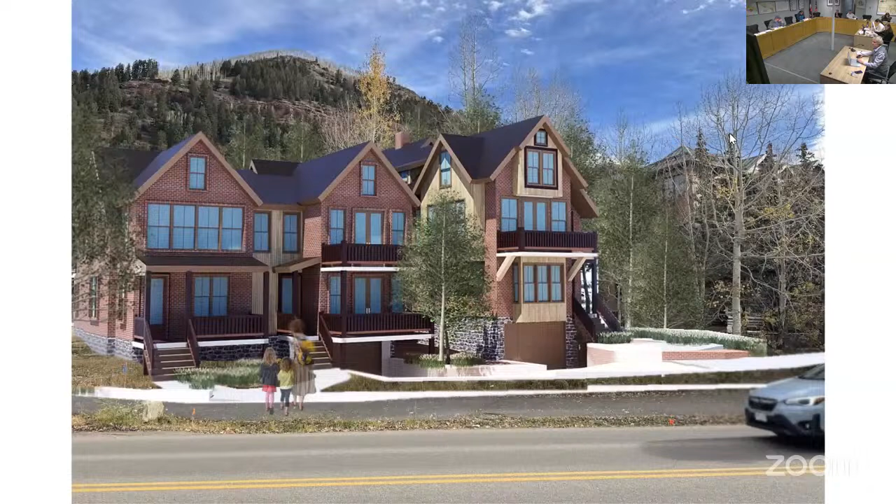One thing I realize is that the access to these are kind of contrary to what we would normally see. You want the garages in the back, but obviously these are going to be in the front. I think on lot 7, the deck over top of the garage door helps minimize the visual impact of that, and I'm wondering if you might do the same thing on lot 8 or something similar to minimize the impact of seeing the garage door. Dropping it down helps, and like I say, on lot 7 in particular, having that deck over there does help.

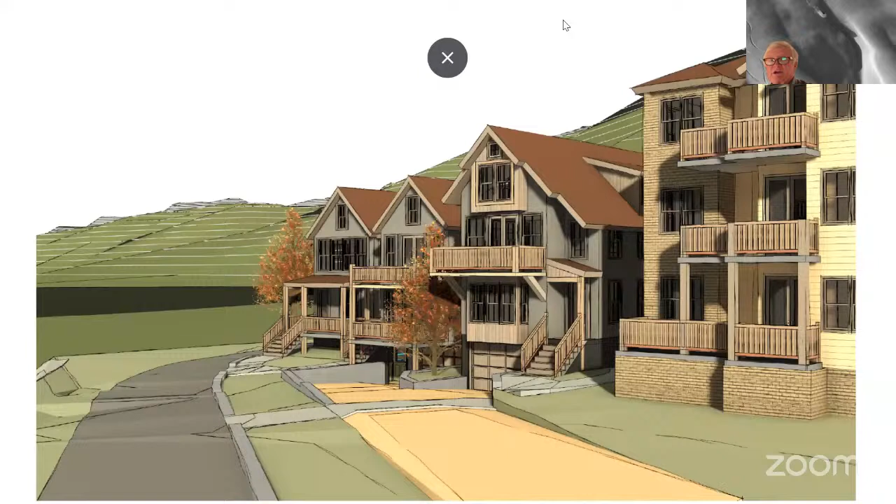And then the big one: I think the third levels should be stepped back on both the north and south elevations. As we just heard on the last case, there must be a wall plane break. A deck alone is not enough.

Okay, I want to try to share something else out here. We're talking about the loft space on units A and B, the farthest west and center, and then also on unit C. I don't think it has to be huge, but I think there needs to be some break in those planes.

Yeah, I'm just showing you the context of the other buildings in the PUD, and I'm seeing that. Maybe not the one on the left there, so.

Okay, and then two simple ones. I think just take a look at the amount of glazing on the north and south elevations. I think that could be reduced.

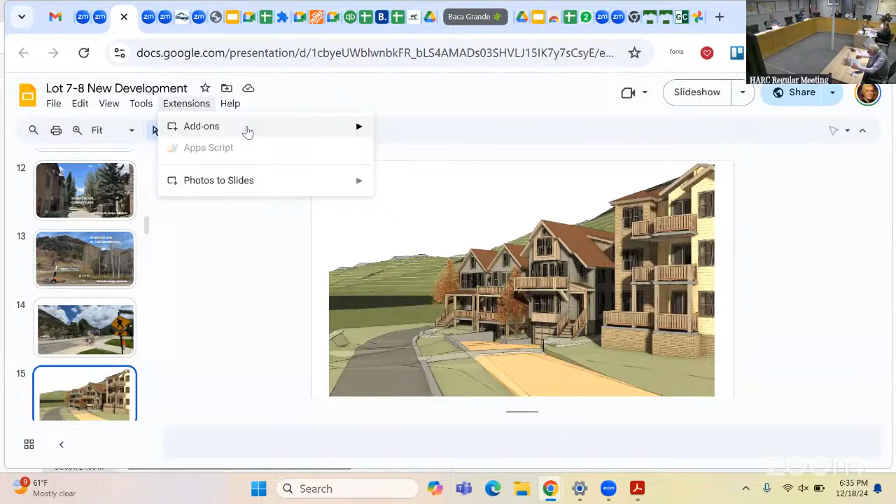This one, no, it's the photomontage. You can see how heavy the landscaping is to the right in front of the hotel. I think continuing that as much as you can - I know you don't have as much space to deal with, but I'd maximize the landscape along there to help reduce the impact, and you can see how it would continue all along there. Right, yep, I agree. That's my comment.

I'll jump in, Mark. I think to me the elephant in the room is providing that buffer and green space to Colorado Avenue. It's a topic that we sort of battled with the developers of the town's affordable housing project across the street on pretty much every project. I'd like to hear what the rest of the commission feels, but it seems to me that the building on lot 7 is encroaching significantly on that needed green space and breathing room.

Looking at that, my first thought was, would you go to P&Z to amend the PUD to move that lot line in between? So you almost flip the amount of square footage - you get the bigger building next to Hotel Telluride, maybe more appropriate as it steps up in scale, and there could be a smaller building pushed further back north on lot 7. I think that move could allow this project to fit in, give the buffer space required to Colorado Avenue, and also step up to Hotel Telluride.

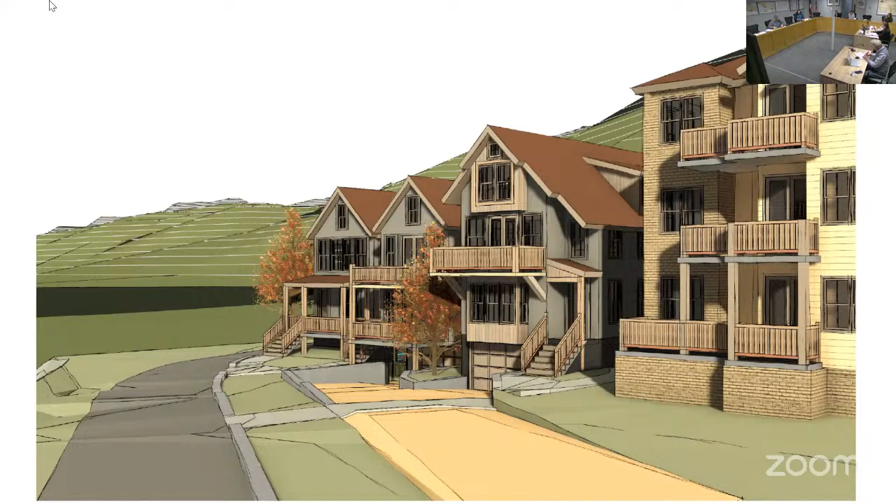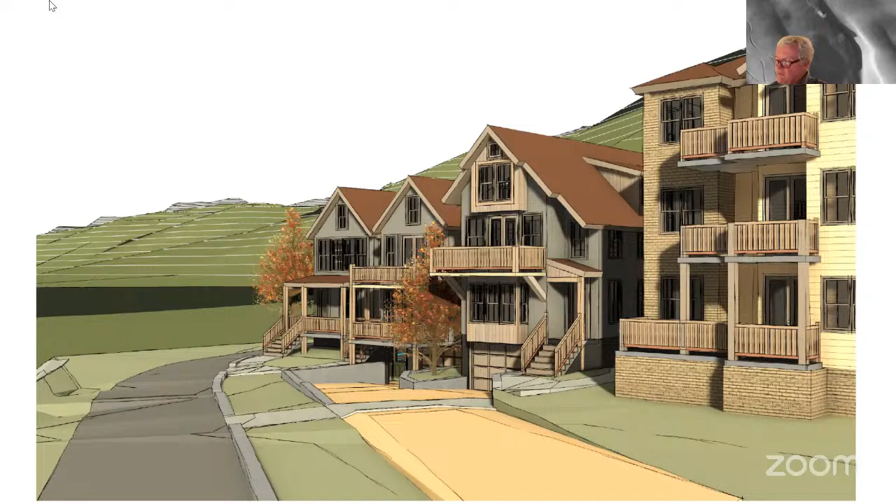Okay Ron, I'll summarize the points here in a minute, but I'm just gonna weigh in on, as Matt said, the elephant in the room. I don't think I could vote for a property on lot 7 that was closer than 20 feet from the property line, being that we were 20 to 26 feet across the street.

I think part of the solution, Matt, we're not here to design it, but a suggestion you may consider is the larger building butted up against the hotel. I don't think there's room, the way this is assigned, for a duplex in lot 7, because to get 20 feet off that property line it's gonna cut that unit significantly. Maybe you can get more square footage than the other one, but that's not our business. But I couldn't vote for something less than 20 feet off the property line.

Off the property line or off the street? Well, the property line, because the property line is set back like 25 feet from the edge of the street. So we're 25 feet and then another 20 feet. Oh I see, never mind, okay, yes, the property line was intentionally set back when they replatted this.

Well, I would say this, stand corrected, so it could be how many feet from the street? Well as it's proposed, how many feet is the house? Yeah, I can calculate that, but I think what I'm thinking is that we compare it to what was approved across the street. If that was 35 feet, then start from that and take a look at that.

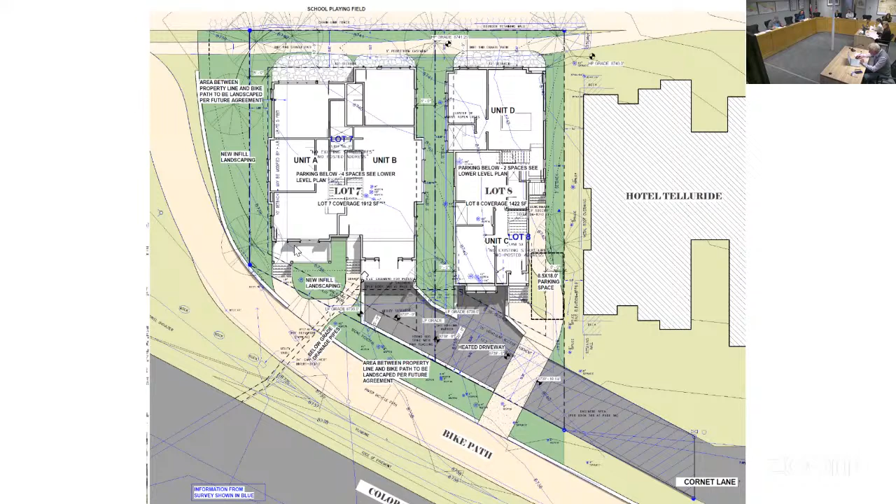I mean, that's a 10-foot wide bike path, so I think that's in the 35-foot range where it's at right now. But well, I think I'll just stand by that. I think something needs to come off of that corner. Won't specify the number of feet further back, but maybe you can gain some more next to the hotel. I concur with those statements.

So the summary I have is maximize the landscaping as for what we approved across the street. Top floor setbacks with change in wall plane, north and south. Fenestration reduction, more public space or a break in the public space from the private space.

Further buffer from Colorado on that southwest corner, lot 7, however you accomplish that. And some simple changes, I agree. I think the somewhat conformity of these three and the rhythm of the hotel, it's already there, but I agree some different detail would be helpful.

And then reducing, I think Kieran hit on the only one that hit on smaller dormer sizes, I think would be helpful with mass and scale at this sensitive entry, especially at this sensitive area. So those are the comments.

Do you have any questions about those comments? No, I'm pretty clear, and I appreciate your comments and Mark, overall. Did you include my comment about minimizing the impact of the garage on lot 8? No, please repeat that to Ron, just to summarize. Sorry, I had it written out.